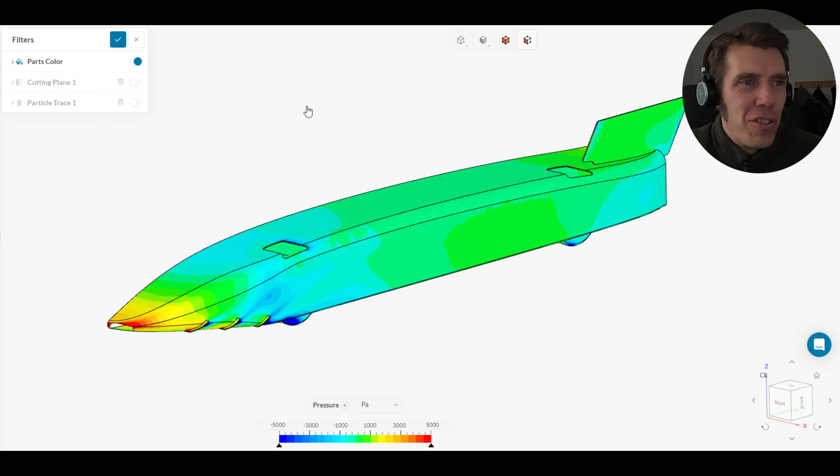Following on from phase 1, my goal was to reduce the sensitivity of the body shell design to any changes in pitch, and I decided to just try a few things to see what might give an improvement. First thing I tried was adding these little flicks on the front lower edge, which are called vortex generators, and I also vented the tops of the wheel arches.

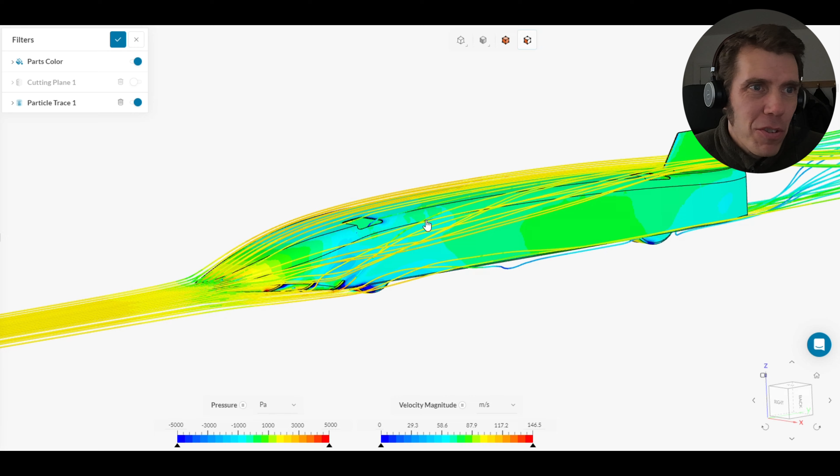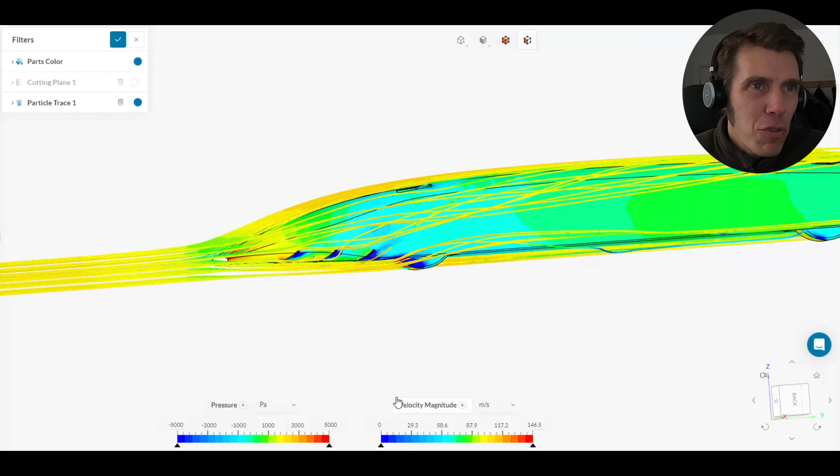Let's have a look at this with the particle tracing on. You can see that it does actually change the direction of the airflow as it goes around the front of the shell, and it helps pull a bit of air out from the front of the front wheel, which could reduce that high pressure zone which is actually trying to lift the front wheels off the ground. So it was looking kind of promising. We'll have a look at how it actually performed on the results in a minute.

Next one I looked at was something a bit more traditional in terms of speed car layout. This sort of bulbous front region is a bit reminiscent of the Le Mans style bodies that a lot of people are using for speed running. So I thought I'd just give that a try and see if that offered any benefits. But you can see here it's not looking good really, from that big area of low pressure, that light blue colour showing there.

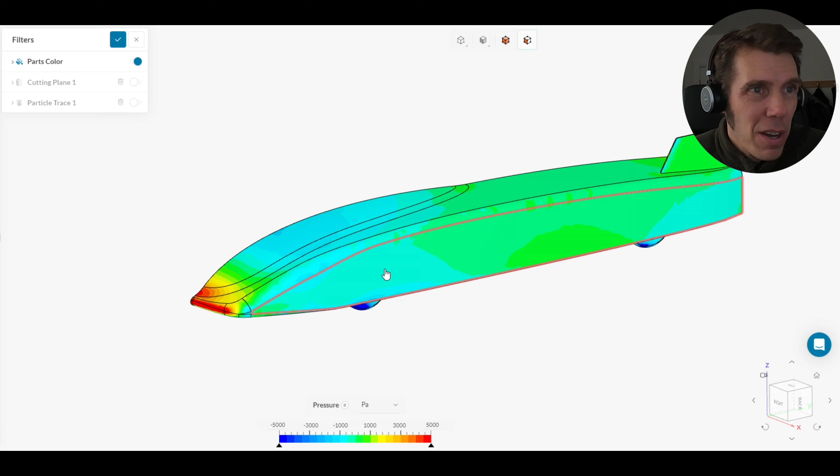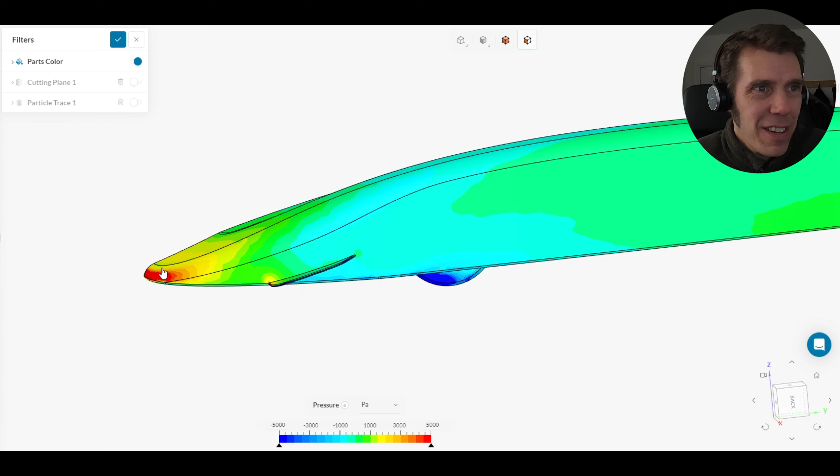What did I try next? Next I tried what's called a canard, which is like a small front wing type device that sticks out the side. You might see these on some more sporty cars. I mean, you might argue they're just for looks more than aerodynamics, but they are used on some time trial cars as well for actual aerodynamic performance. My thinking was that this could give a bit of extra downforce, but without being too sensitive to the pitch angle, not like a splitter, which I think would be more sensitive to pitch angle.

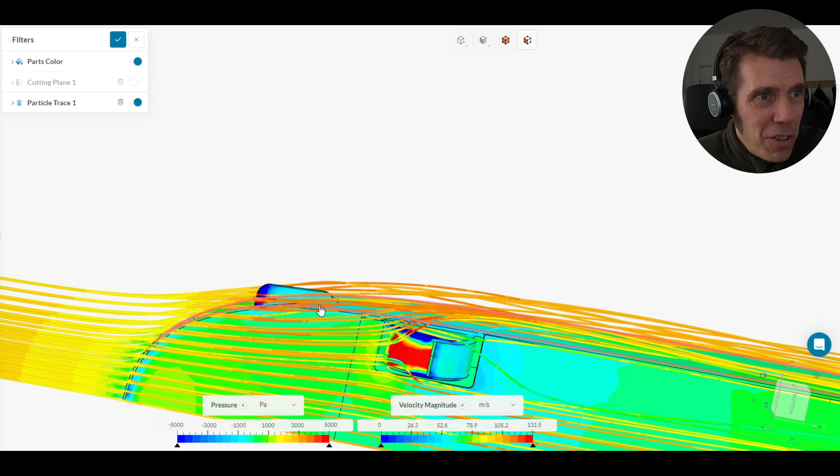From the particle tracing, you can see that a bit like those vortex generators, it was successful in pulling a bit of air out from underneath there. It's generated some low pressure underneath it, which will help give a bit of front downforce. And it's interesting because you can actually see the air that's churned up by it as it goes through. So yeah, I think that's particularly interesting.

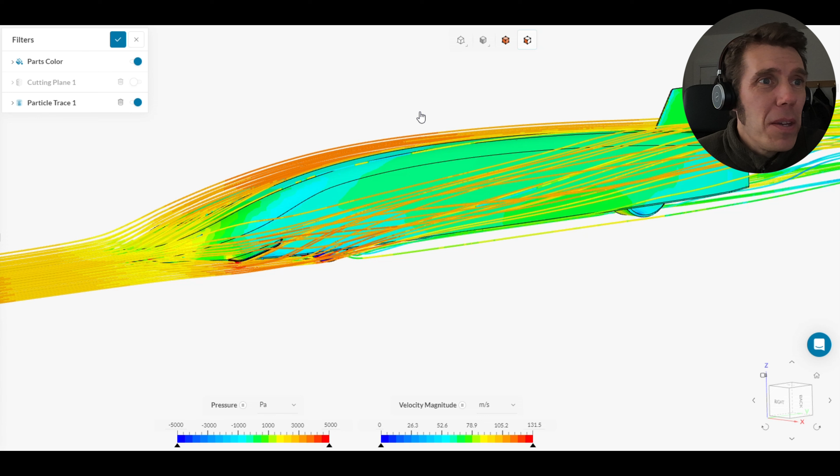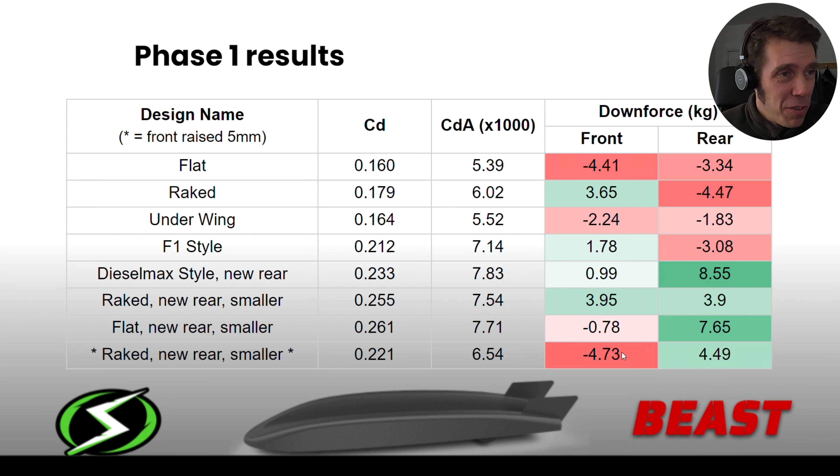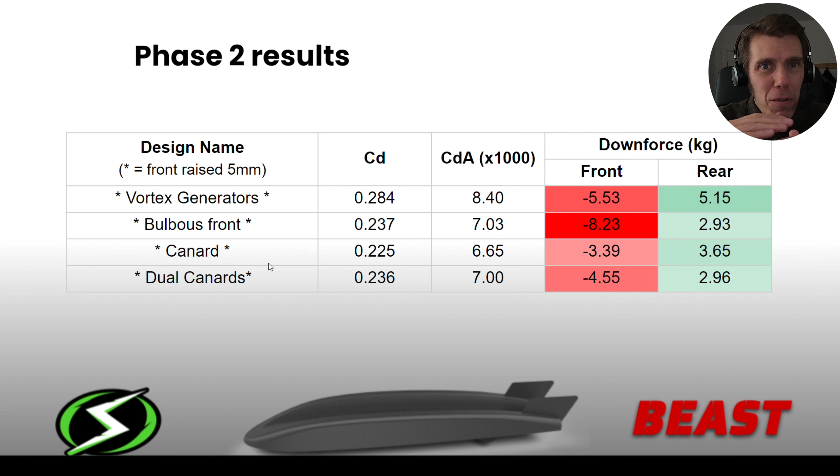So I went on to explore that in some other runs. Just to prove whether it worked or not, I did a run both with it and without it, at static sag this time. I didn't mention, but all the runs I did before that were all with the front raised. And what that showed was that there is definitely a benefit of having that canard on the front. It generates around 3 kilograms more front downforce compared to not having it.

But this raised a bit of a question, because I seemed to have lost all the downforce off the rear as well in this run. So this is where I started finding my CFD results a bit confusing and a bit contradictory of what I'd got previously. It's difficult because I had made other changes to the design as well, like I had hollowed out more of the inside of the body shell to better represent the airflow. So maybe that was having that effect. But it was hard to know exactly what had caused what, because I hadn't done it step by step, changing only one thing at a time.

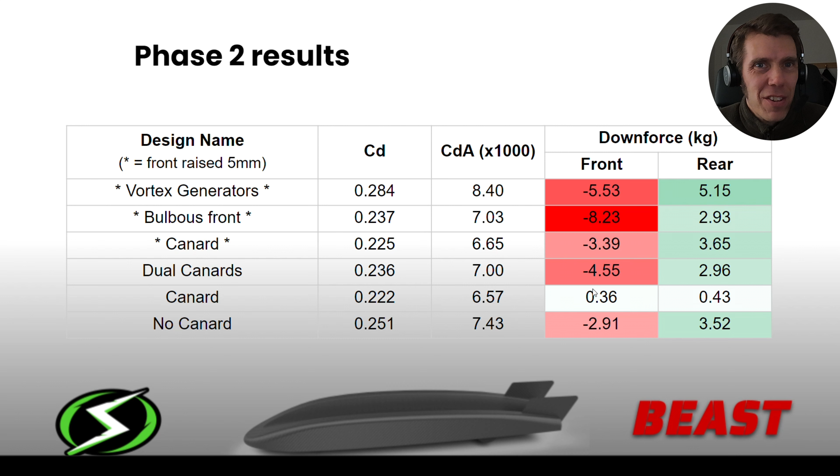So finally, I did go back to one of my earlier models and added the canard to that, with the front raised. I think this was showing that the canard does seem to be having a benefit again, because the earlier model was showing about minus 4 kilograms in this condition, so it's about 3 kilograms better than before.

And then in the static sag condition, this run here is showing quite a good balance front to rear, but again, some of the downforce seems to have gone that it had before. It used to have nearly 4 kilograms front and back, so where's that gone? Is that just from adding the canard? It seems sort of unlikely.

And then finally, I made a bit of a change to that model and connected the wheel arches, and also changed from a single central fin to a fin on each side. So again, I made the mistake of changing two things at once, so it wasn't totally clear why I'd then lost most of the front downforce. I think that's probably mainly because of the wheel arch modelling, though, because I'd changed between single and dual fins in the past, and it hadn't really made much difference.

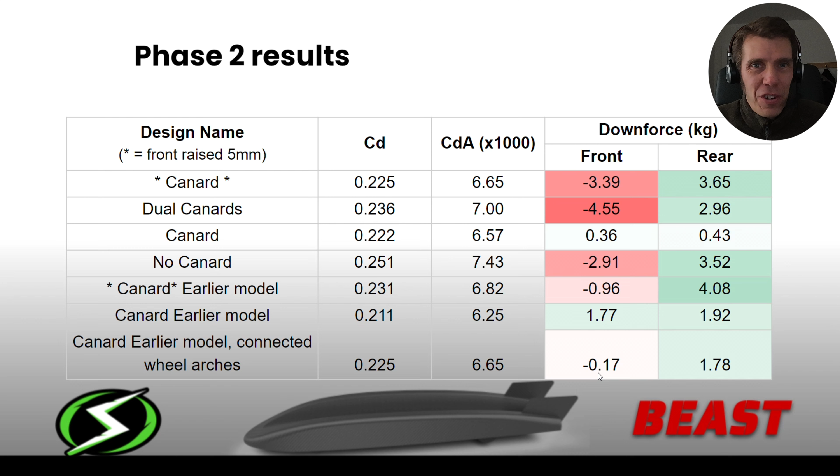But at this point, I'd basically run out of CFD runs, because you only get so many free runs on SimScale, which I was using to do this work. And I'd also run out of time. I just had to freeze the design so that I could finish all the details of it, so I was ready to manufacture it.

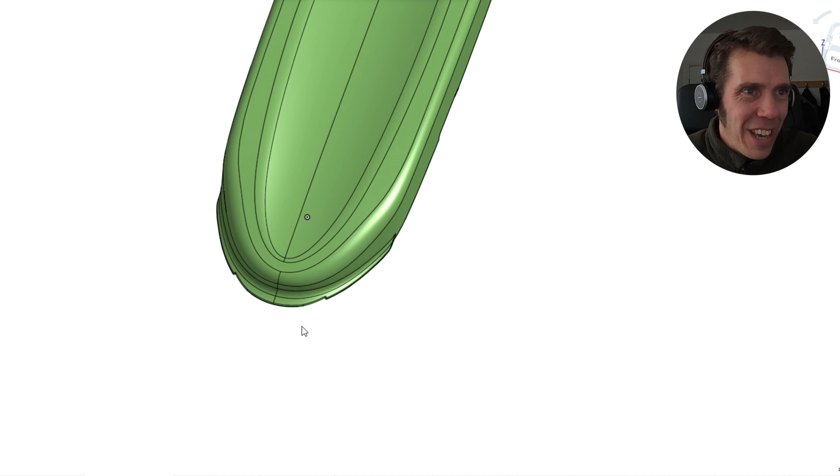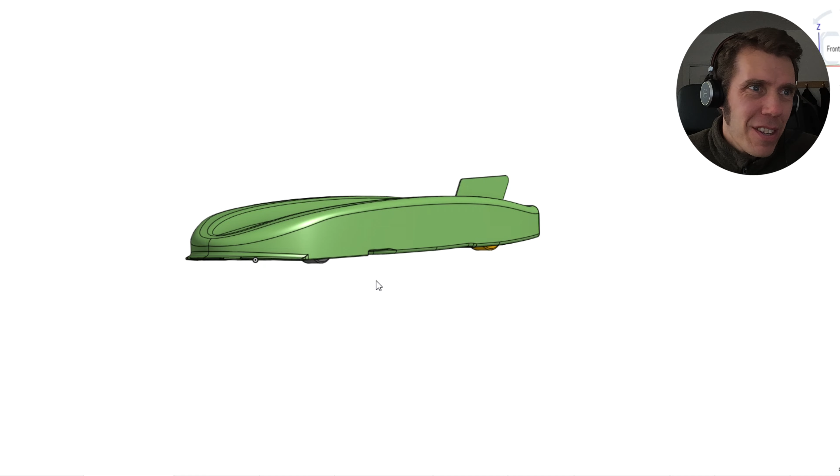Before we move on, let's have a quick look at a couple of the designs that didn't make it, that just look a bit weird. So here's one I tried where I thought it might be better to push some of the air around the sides of the car rather than over the top, because I found that if you push the air over the top, it speeds up and generates low pressure. So that was my thinking with this one, and I've also thrown in a bit of a splitter effect and the Dieselmax underfloor style. Unfortunately, this was just so bad looking that I didn't even try it. Maybe I should have tried it. Who knows?

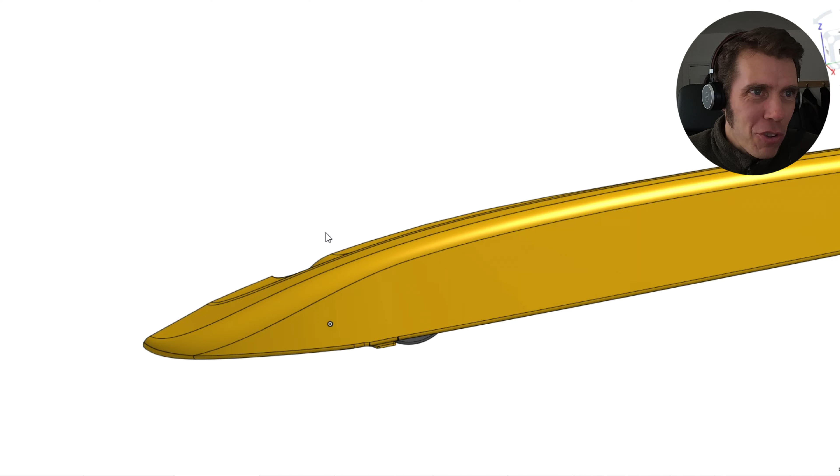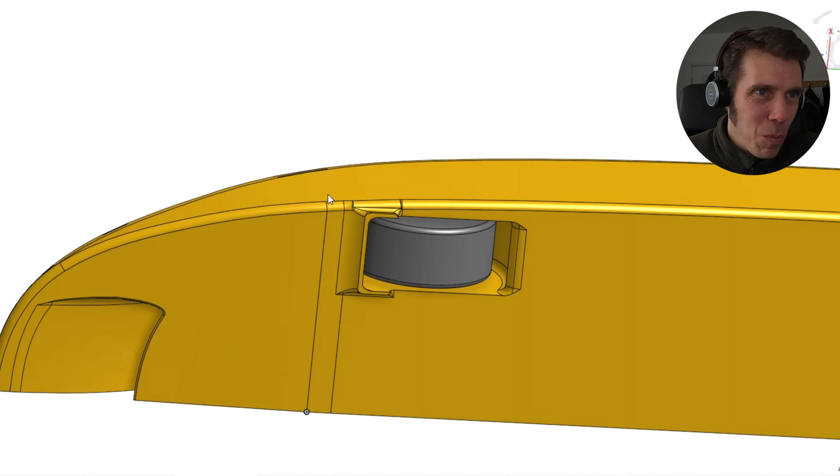I've got another one as well, which is quite funky. I was finding that there was a bit of a high pressure zone underneath the front of the car and low pressure on top. So I thought, why don't I just join the two together? Hence I made this sort of weird air channel that went from the bottom to the top there to try and reduce that effect. Unfortunately, I didn't find any benefit from that. You can also see it's got a sort of air deflector thing in front of the front wheel, and again, I found that didn't work. Instead of getting high pressure on the front wheel, you just got it there instead, so it just moved the problem somewhere else.

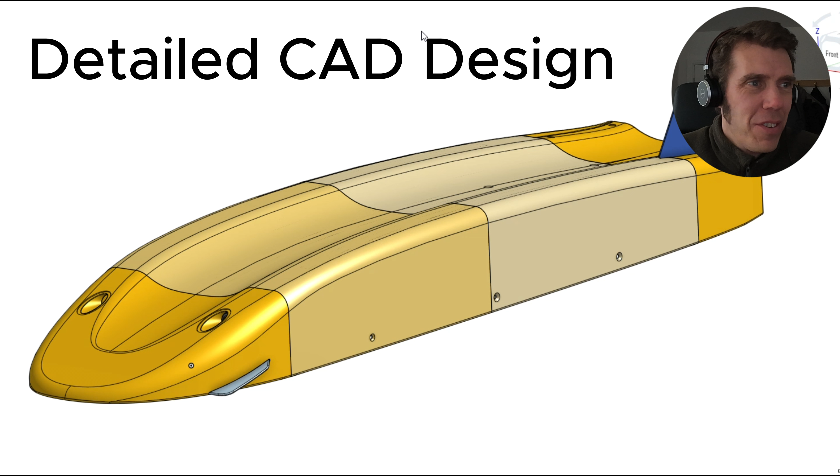Anyway, it's a bit of a light-hearted look at a couple of the designs that fell by the wayside through the development process. I'm going to show now why I had to freeze the body design and its shape, and why I'd run out of time to do any more work on the CFD - that's because I had to add in so much detail to it to be able to 3D print it and make the body shell. Because what I'd been working on previously was literally just the outside shape, none of the internal details, how it was going to be made and joined together was there.

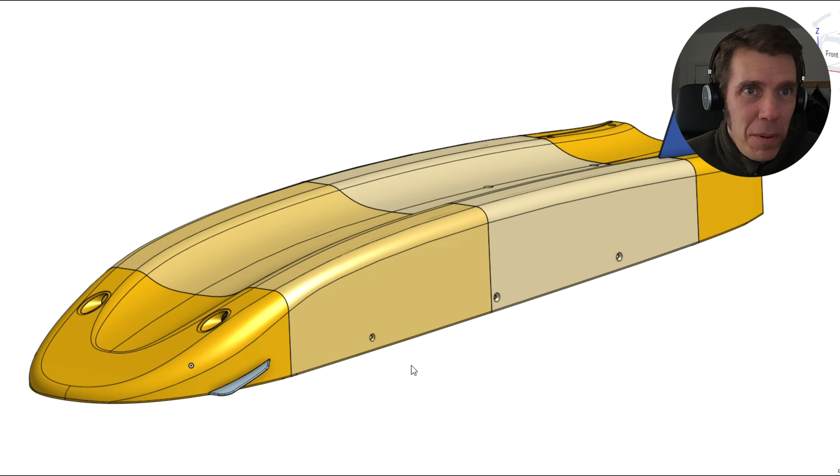So this is what I'm going to show now. This is actually the final assembly. I'm going to do a bit of a CAD spin of this and just go through it piece by piece. So let's start at the front. So if I can hide off the other bits in here.

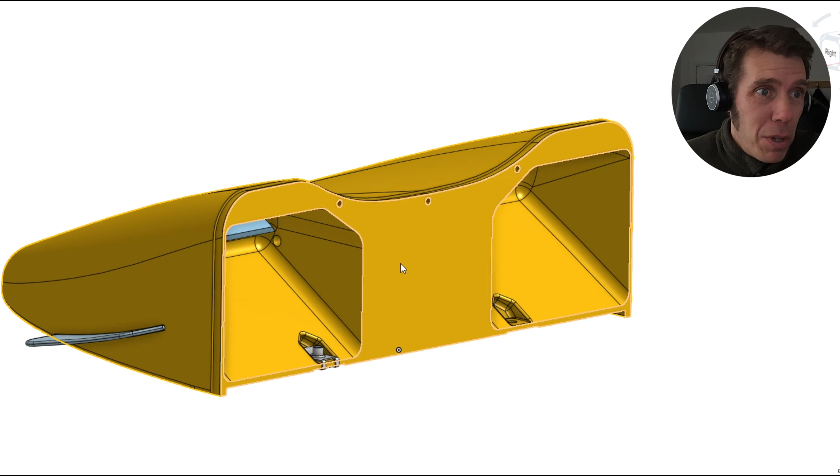There we go. So this is designed with 3D printing in mind, so it's printed with this face on the build plate. It's got mounts for clip nuts to allow it to be attached to the carbon fibre plate chassis. And I've designed it with the lighting system in mind, so I decided to use an LED type lighting system.

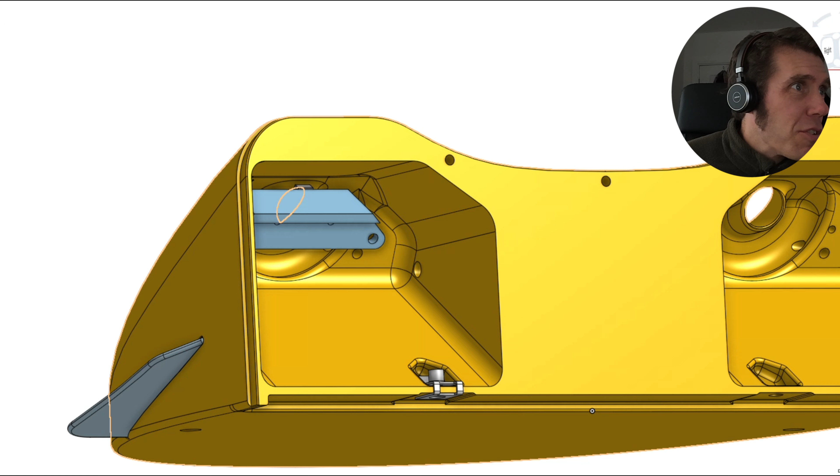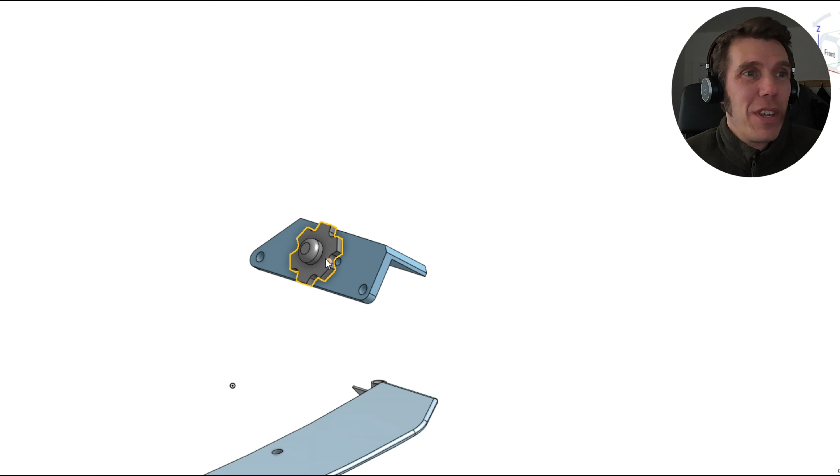If I just hide that front piece, you can see that - so this is the LED itself. It attaches to this piece of aluminium L section, a material you're probably familiar with from my other videos. That's there for heat dissipation. I was worried that without it, it would get so hot it would start melting the 3D printed plastic around it. So by having that there, it spreads the heat into it and gives it more surface area for the heat to go away into the air from.

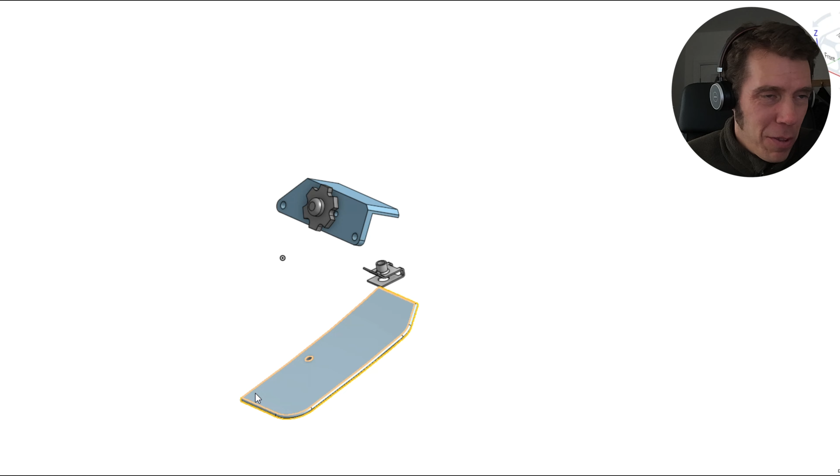With the front hidden off as well, you can see how the canard goes in. The canard itself is like a 3D printed piece that goes into a slot in the main front end part.

There's a little recess here. This is interesting because I can cut a thin bit of polycarbonate, glue it into that recess, and then I've got a fully faired-in light system, which will be the best for the aerodynamic performance.

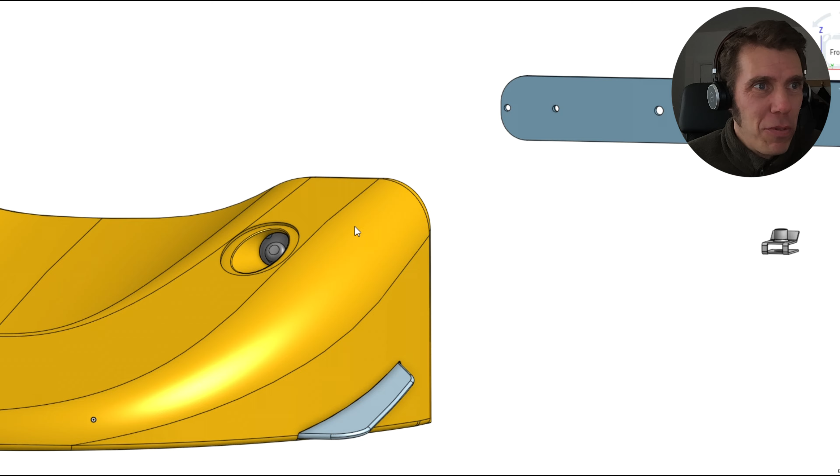Those are the main features of the front end there. You can see there's a little retention screw for the canard that I didn't mention.

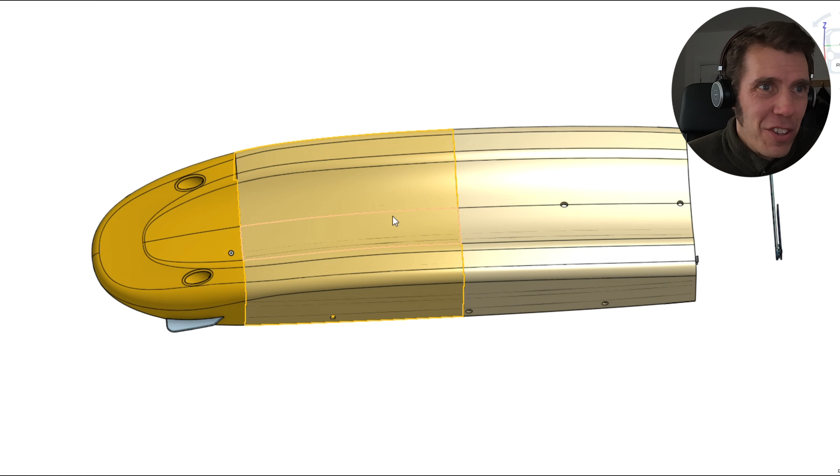So let's look at the middle now. The middle's made of 2 pieces which are quite large - over 300 millimeters long each of these sections. You'll see in my next video that they needed a special 3D printer to make them because they're so big.

I've added mounts along the sides - that's what these holes here are for. So they go on the screw, and it goes through the body shell and into a clip nut on the chassis.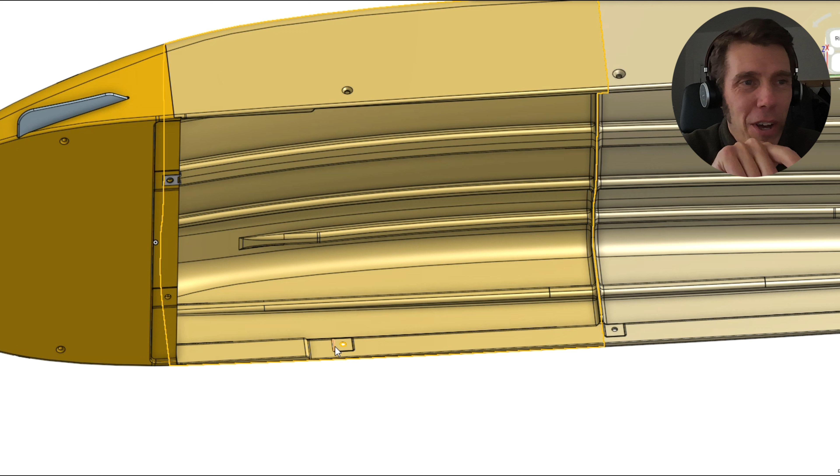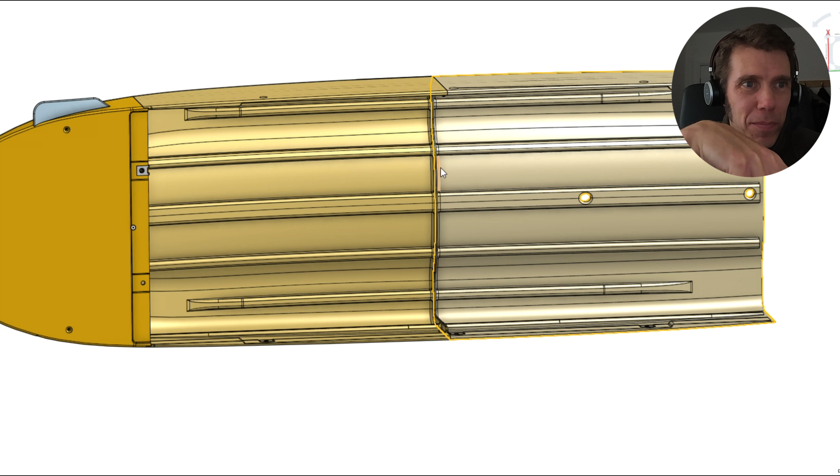I added these longitudinal ribs to give extra stiffness and strength, and you can see they're joined in the middle with that sort of mounting flange thing. That also gives it an area to sit on the 3D printing build plate, so they're built from this face upwards. You'll see a bit about that in the next video.

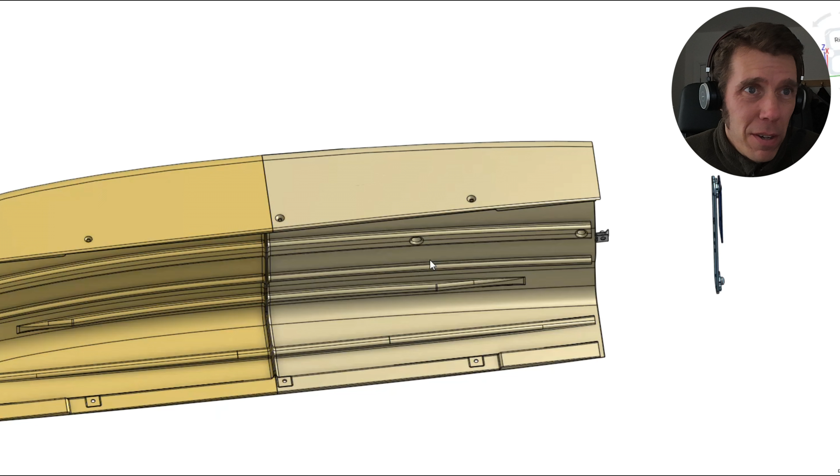These 2 sections are actually quite similar in how they're designed. The only exception is this rear part has got a couple of holes for the 2 aerials I've got on the car. So if I hide off all of them and put the rear on - the rear's on. Hide off the other ones. Yeah, there we go.

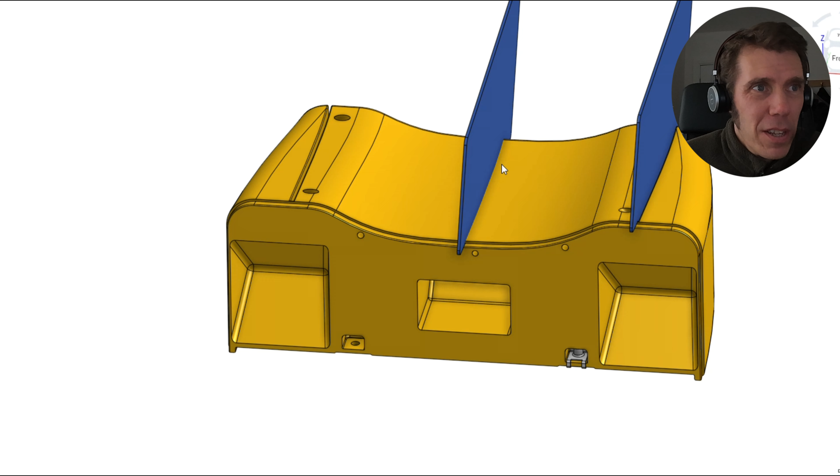Interestingly, I've got a fin showing in the middle there. Early on I was thinking of having several options for the fins, like one in the middle, one on each side, or even 3 fins if I wanted to. But in the end I decided to scrap the middle fin because it was interfering with my idea for the light layout of this rear end section. So I'll just get that off the thing there.

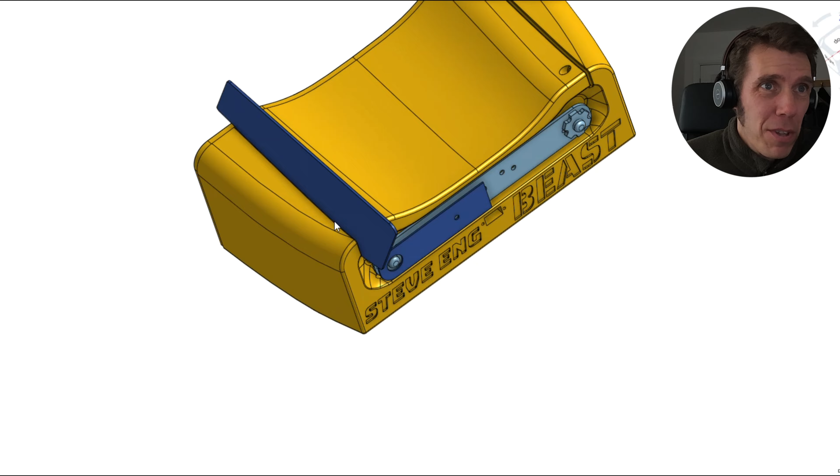The fins themselves are actually held on with a couple of screws that go through there, which I think is quite a neat way of doing it. They've got just a slot that allows the screw to go through at an angle, which is quite a neat way of holding it on, I thought.

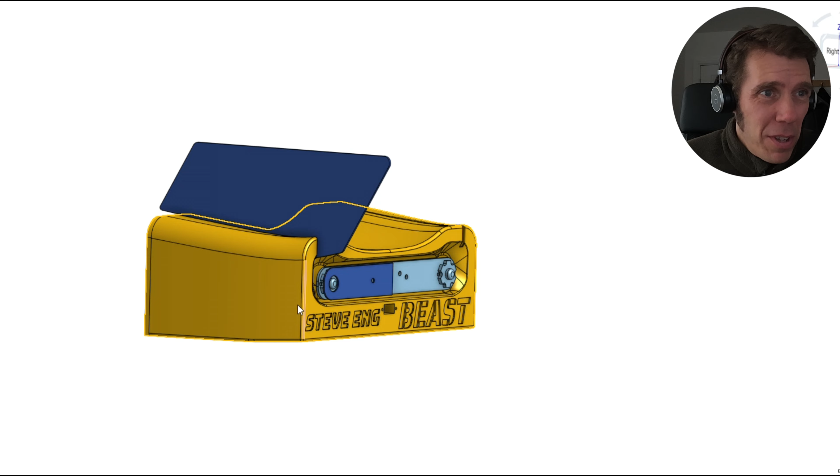Again, I've got an aluminium bar here that the LEDs go onto for heat management. That's then screwed into the 3D printed plastic of the body, but with an air gap - the aluminium isn't directly bolted to the 3D printed plastic there.

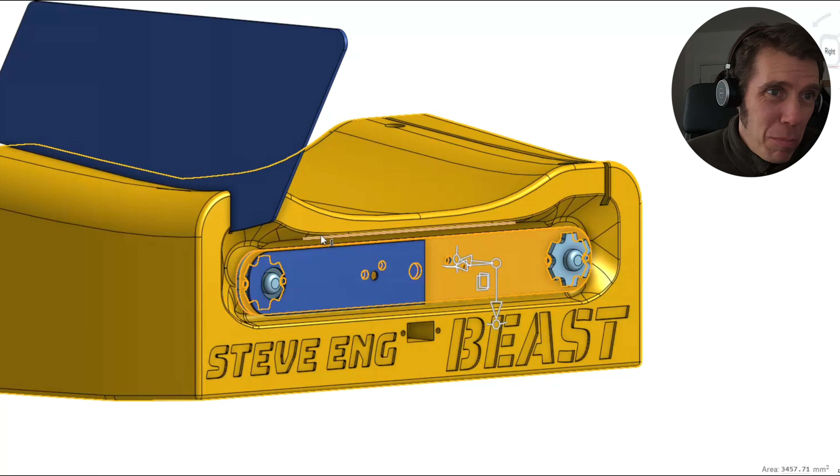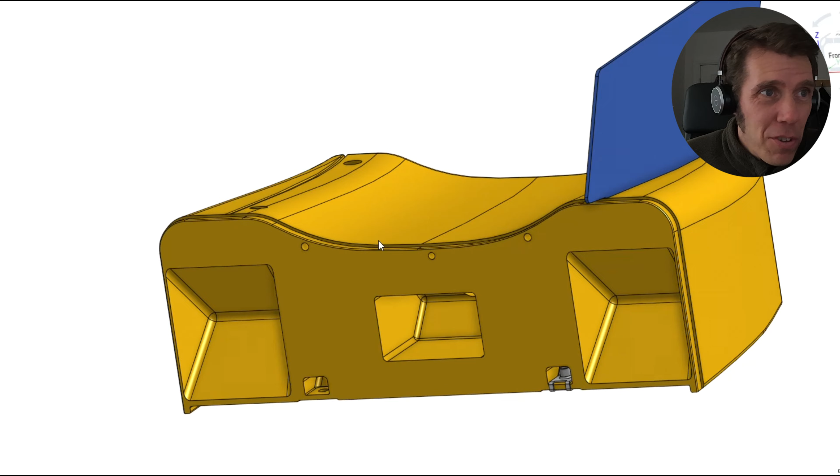There's a little hole here that's for the switch for the light system, and I've also got the clip nut mounts that you saw at the front and a little recess for the light wiring there. If you're wondering what these little holes are, they're actually for some connecting rods that go between each component.

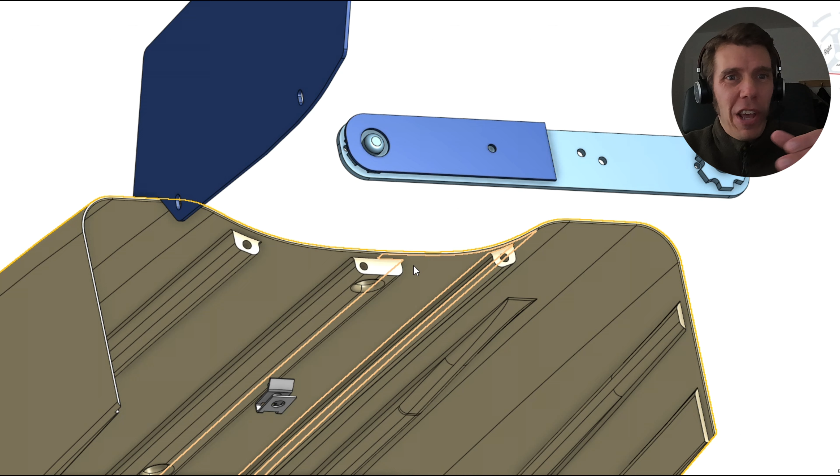So if I hide off the rear and show the middle again, you'll see the corresponding holes on those ribs. That one obviously had to be offset to allow for the aerial mount there. So I'll just use some rods to help with the alignment when I'm gluing the parts together, because my plan was to epoxy these components together.

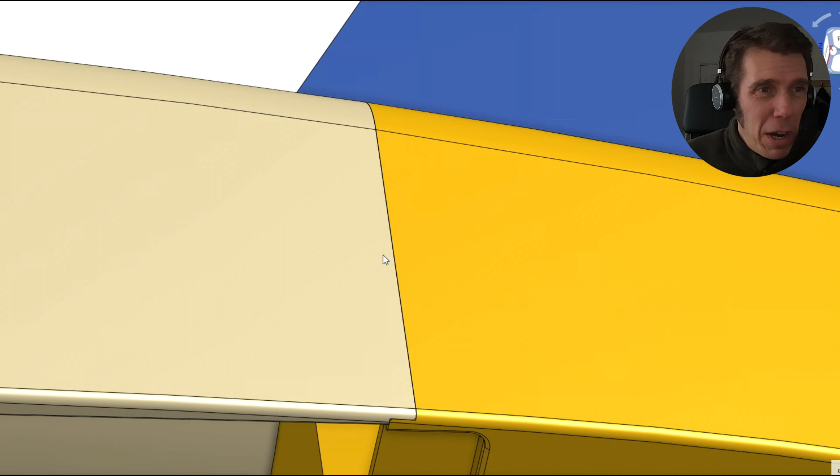And there's a little bit of an overlap as well - you can see it there. There's this sort of extended piece that overlaps with the next piece to give a bit more area for gluing and help it be held together securely.

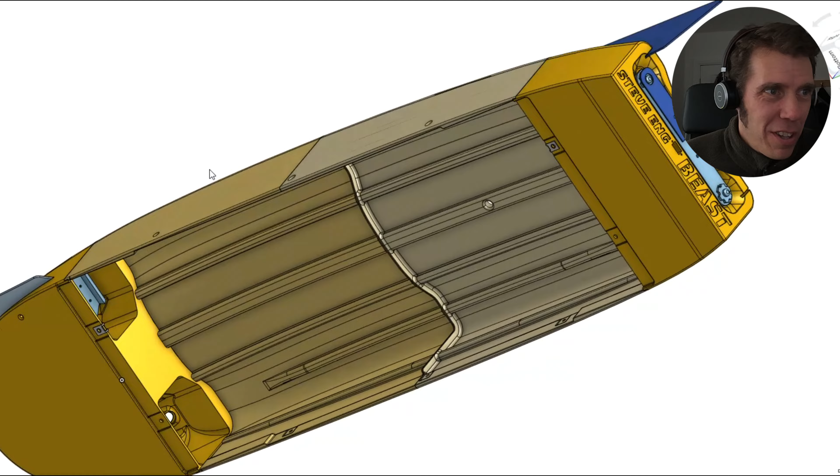So there we have it. That's a bit of a whirlwind tour of my detailed body design, and it was something I had to achieve in quite a short space of time. I'm quite pleased with how it went actually. So before I knew it, I was then starting to 3D print these pretty massive bits of body shell that you'll see on the next video.

Let's have a look at where we got to against the requirements we started out with. In terms of frontal area and drag coefficient, the frontal area was minimised - the chassis was optimised to make it narrower. The drag coefficient I ended up with was 0.22, which is actually pretty good. Thinking back to the previous video, there weren't many cars achieving that.

In terms of balanced downforce, there's some unknowns there, as we saw. Some confusing results mean I'm not entirely sure whether I've managed to achieve that one or not, so that one is a question mark. I'm trying to mitigate against potential issues by having different size canards to potentially run the car if I do run into issues, and I could potentially make different versions of the body shell with more or less downforce at the rear.

So for space inside the chassis for tyre clearance, I made sure there was at least 5mm sideways and 10mm plus in the radial direction to give plenty of room for any tyre expansion or suspension movement. So I think that's a tick.

And how tolerant it is to ride height and attitude variation - unfortunately that also falls under the category of not entirely sure. We'll have to see how it goes from testing and use the test parts if necessary. For directional stability, it's something I could have tested in CFD by running the whole body shell instead of half, at a slight angle to the airflow, to see if it generated a turning force making it go more into the airflow or away from it, which would be bad. But unfortunately I ran out of time and CFD runs to do that extra study, so I don't know where I am with that. But I've got different test parts to allow some tuning if I need to, like different height fins that will affect that and let me tune it if I want.

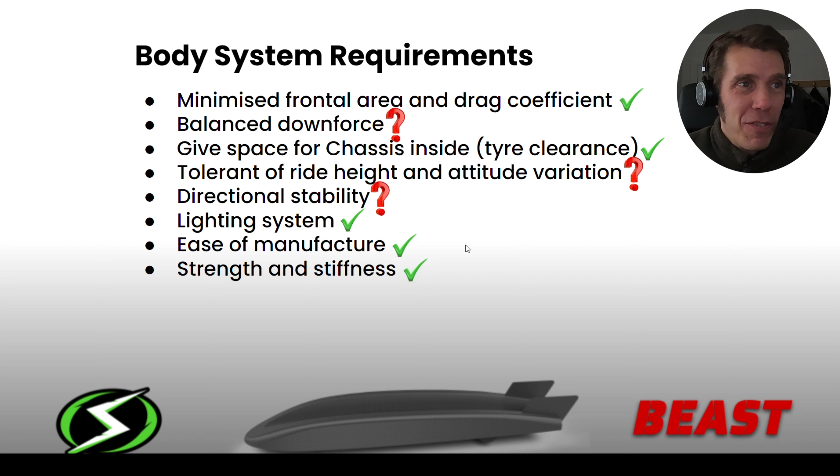So I think I'm looking okay. I've been forgetting to tick these off - so yeah, there was a question mark on directional stability, we can tune that, and the other ones are achieved. So not a bad result.

So as you'll see, I got to my final body design eventually. It was a bit of a journey along the way, and I had a few learnings.

The first one was that in doing the CFD, don't change too much at once. I found that if you change more than one thing from one run to another, you won't really know what caused any difference in results that you see. So that's my first top tip.

My second tip is to keep your CAD model simple when doing the CFD, but it should model the key airflows. Like I mentioned towards the end of the CFD, I connected the wheel arches up - meaning I connected the front and rear insides of the body shell, because in reality air can flow through that region, so that should be captured in the CFD model.

The final one is that generally it takes a lot of runs to fully understand what you're working on in CFD. Unfortunately I didn't have that at my disposal - I had a limited number of runs because I was using the SimScale free plan, where you get 10 free runs. Maybe it's best not to start down the journey of doing CFD unless you can access a lot of runs to fully explore and understand your designs.

Hold on, that was a bit negative - I don't want to end the video on that kind of note. So to put a positive spin on it, SimScale is a great tool, and it's so generous of them to give us 10 free runs to use as we want. Within those 10 runs, I think you could get a good understanding of whether your proposed body shape works or not. Where you might run out of runs is if you want to develop that further and explore different options.